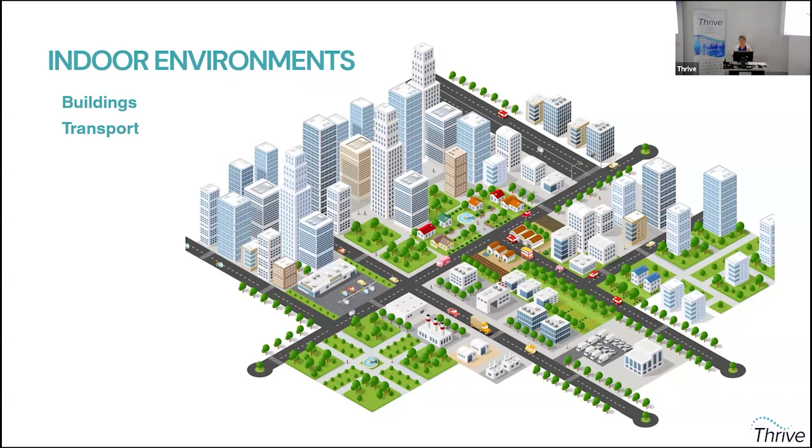The second premise relates to what is an indoor environment. I think we would all agree it relates to both buildings and transport—actually inside cars, buses, trains, etc. My next question is, should the report we're proposing for next year include buildings and transport environments? At this stage, the team I've been working with have only been focusing on buildings because we probably spend a lot more time in buildings than in transport.

Except perhaps for me—for example, I commute from the bottom end of the Gold Coast, so I spend 4 hours a day just coming to Brisbane and back to go to work, so commuting is fairly high for me.

But 4 hours a day is still much less than what I spend in buildings. So at this stage, we haven't looked for any quantitative data regarding the indoor air quality of transport environments. If anybody knows of any reports we should include, please let us know. What we're envisaging is that next year's report likely won't include transport, but it should be included in a reiterative report down the track.

So if we're looking at buildings then, I wanted to get an understanding of how we can best structure the report so it makes use of existing structures. One of my areas of research is the National Construction Code, which puts buildings into 9 different classes depending on their general use.

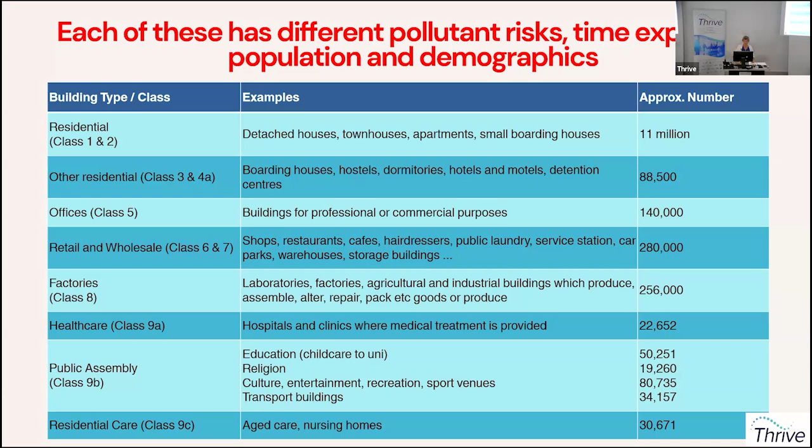Does anybody have any thoughts about this? The intent is to present the scientific evidence in a manner that's familiar to the policymakers and to the industry who are all involved in the design, construction, refurbishment, etc. and operation of buildings. Does anybody have any thoughts about that?

Just on the operation of buildings, the NCC doesn't really cover that—it's more of a builder's spec. Okay, I'll address that in a moment. So the comment, for those who mightn't have heard, is that the NCC covers the building's design and construction, not necessarily its operation. I have perhaps a provocative view on that I'll mention in a moment.

So, yes, mine. So we... yes, I'll touch all of it. You're absolutely right to group residential class 1 and 2 together.

But of course, class 1 buildings are in volume 2 of the NCC, whereas class 2 buildings are in volume 1. It's difficult to treat them as a single group because they have such different regulations, so the solutions for class 1 and class 2 buildings might be different because one you're talking about low-rise and single dwellings compared to high-rise buildings that are more commercial-like.

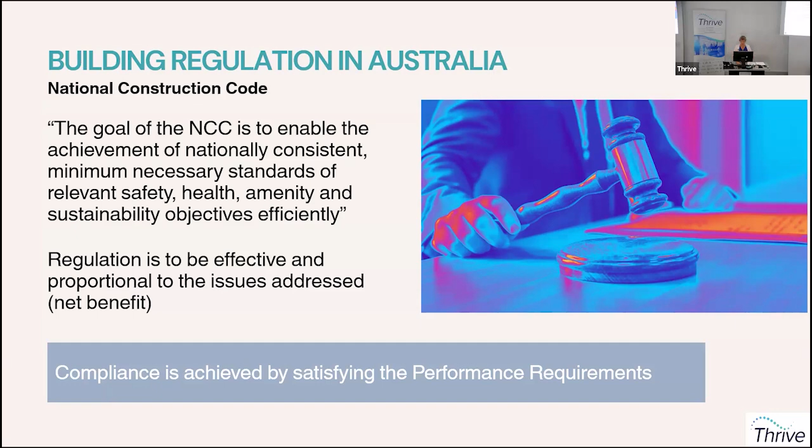Compliance with the National Construction Code is achieved by satisfying performance requirements. In the code, there are certain things called performance requirements that you have to meet in the design and construction of your building. So is indoor air quality regulated in buildings?

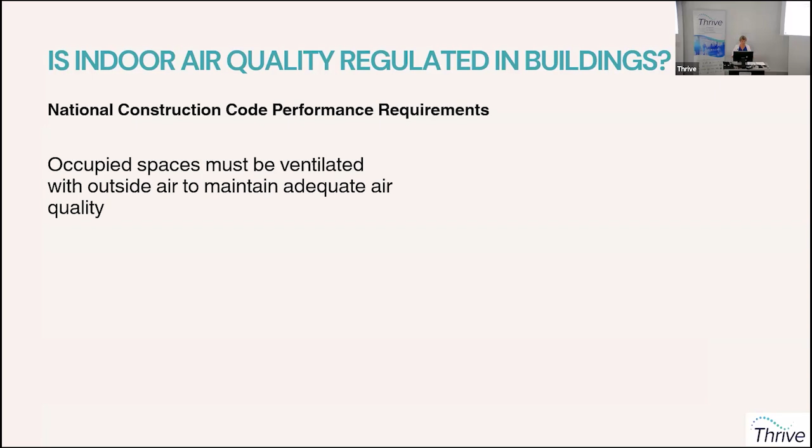I believe that it is. In the National Construction Code, one of the performance requirements is that occupied spaces must be ventilated with outside air to maintain adequate air quality. The second performance requirement is that mechanical systems have to be able to control the circulation of odours, harmful contamination, microorganisms, pathogens and toxins. These are must-have requirements within the building code.

The third is that any contaminated air must be disposed of so it doesn't create a nuisance to other buildings. This was an interesting one to me. I did a 6-month fellowship in London where the outlet from the gas appliances of the neighbouring unit was right next door to the fresh air intake for our unit, for example. So it was some of those things.

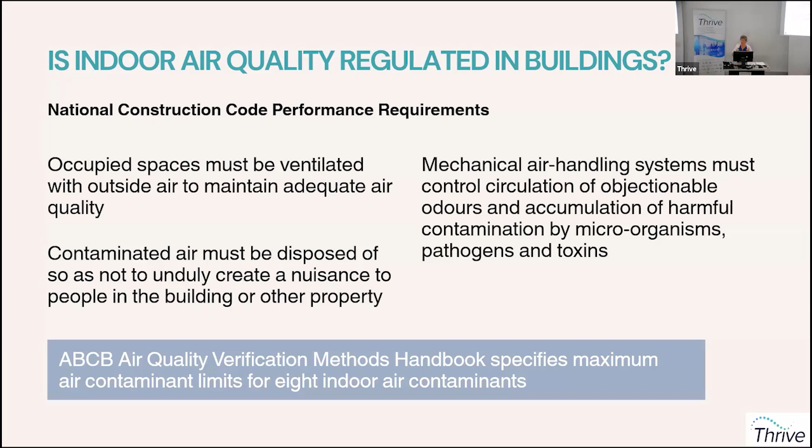So those are 3 examples of performance requirements already mandated in the National Construction Code that deal with indoor air quality. In addition, the Australian Building Codes Board, which manages the regulations, published an air quality verification methods handbook that specifies the maximum air contaminant limits of 8 indoor air contaminants.

In addition, in the code, smoke alarms and/or smoke detectors are required for all buildings. In Class 1 buildings, they must all have a smoke alarm, and in Class 2 to 9 buildings, they must all have smoke detectors and smoke alarms. So we already have mandatory indoor air quality sensors in every building in Australia, and in multiple rooms in every building in Australia.

So I've heard some people say, well, you can't tell people what to do in their individual homes, we can't tell them to have sensors. Well, that's nonsense - from the perspective that we already do that for fire, why not do that for air?

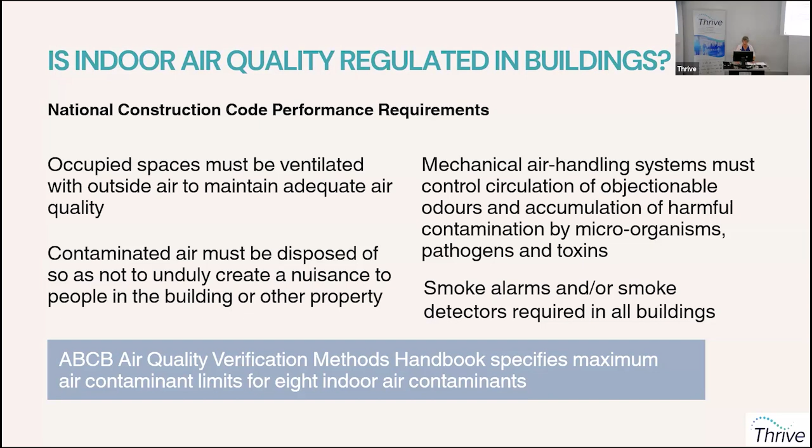It does raise a question, similar to what's reasonably practicable, which we'll address in a moment. What is adequate air quality? Maybe that can be interpreted differently depending on whether you're a scientist or whether you suffer from an illness that's particularly triggered by air quality.

But I'd argue that because the Building Codes Board have produced a handbook that sets limits to 8 pollutants, they're already saying this is the minimum level required. It would be interesting from a legal case perspective whether compliance with those requirements would be considered adequate air quality.

The question is, and it relates back to the question before about it being for design and construction of buildings, not operation - are the performance requirements enforced only at design and completion? Because in essence, a building has to show it meets these requirements before it's allowed to be occupied.

But does that go into the operational phases? Just a show of hands - who thinks it's just at the design and construction phase? Who thinks it is at the operational phase? And who doesn't know?

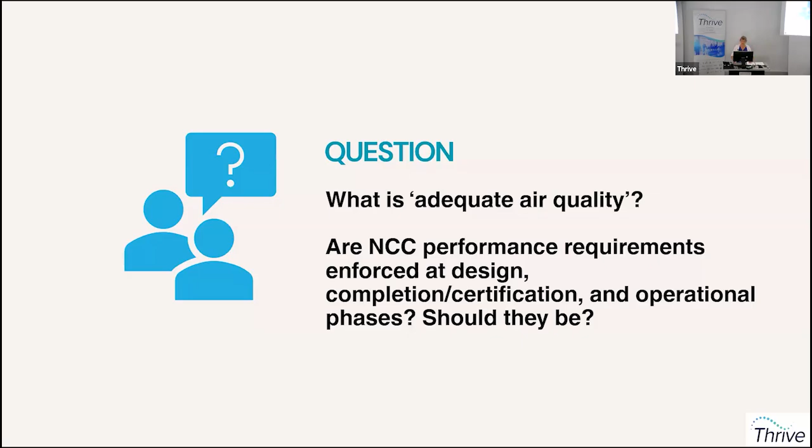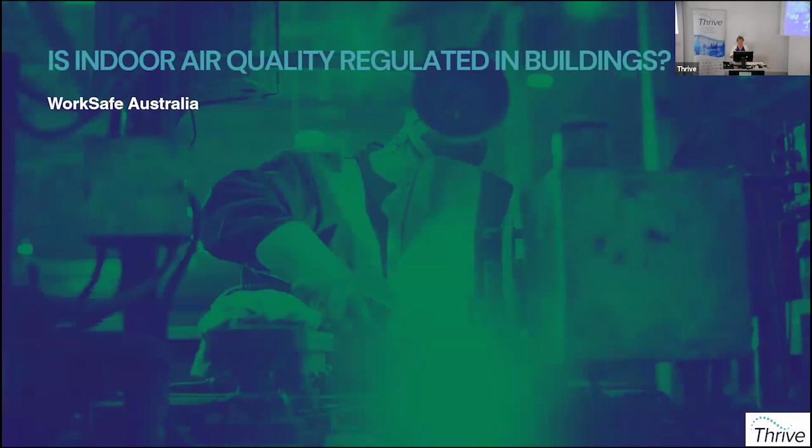I'll just look at other legislation - part of this was discussed this morning too, about whether indoor air quality is regulated. WorkSafe Australia was mentioned this morning as well. So, similar to the National Construction Code, the federal government doesn't provide legislation on workplace things directly - they provide a model code and the states can decide whether to adopt it, not adopt it, or modify it. But there are certain things within that code.

I'm just going to move off the chat for a bit so we can see the slides. As Liam mentioned this morning, if you're a person conducting a business or undertaking, you have a legal requirement to manage the work health and safety risks from air pollution at the workplace.

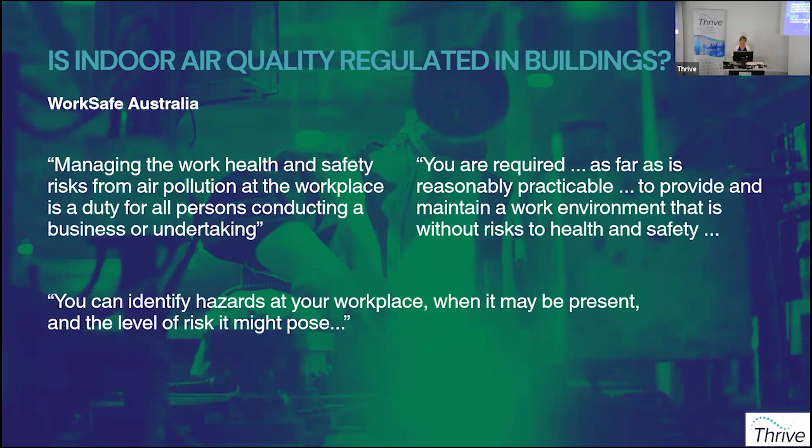Let's see if I get this done. You are required - and here's the word again - as far as reasonably practicable, to provide and maintain a work environment without risks to health and safety. There are some guidelines on how a business might do that through a risk management approach: identify the hazards, when they may be present, and the level of risk they pose, so as a workplace owner you can put in place ways of managing that risk. It's a risk management approach.

This morning we had a discussion about what 'as far as reasonably practicable' means, and as I tried to intimate this morning, that really depends on whose perspective you're taking. If I was a building owner and it would cost me money, I would say anything that costs me money is not practicable.

I would argue that what's reasonably practicable, which also means economically viable, changes from year to year depending on what technologies are available. So for workplaces now, because of the rise of low-cost sensors, the Internet of Things, and AI, it is probably reasonably practicable for most workplaces to put air monitors and sensors in nearly every workspace in an economically viable way. That's still to be determined, but that's one of my suggestions.

And as Liam also mentioned this morning, even though the WorkSafe guidelines are for the protection of workers, they're really to protect all people who go to a workplace. So that means everybody who goes into a shopping centre, a cinema complex, an indoor pool, or a gym, for example - the owner of that business is required to protect the air quality for everybody who goes into that place.

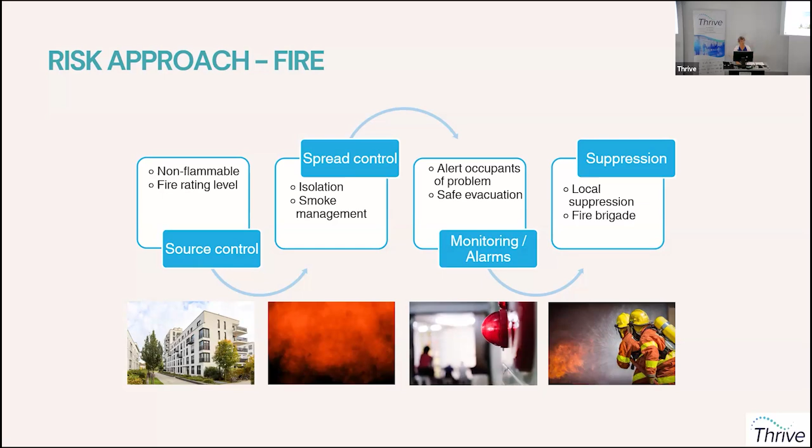So that risk approach to fire could be applied, for example, to indoor air quality. But the two main things from that risk approach are: first, that occupant safety is the priority of the approach to fire - it is not to protect the building, the things in the code are to protect the safety of occupants. Secondly, there are different solutions to fire management for different buildings depending on the context, the type of building, how many floors it has, and how far you are from a fire brigade.

Can the fire brigade hoses reach beyond 11 stories or so? The size of the building, the number and type of occupants, etc. So already there's a framework within the codes that provides a fairly good framework that we might like to apply.

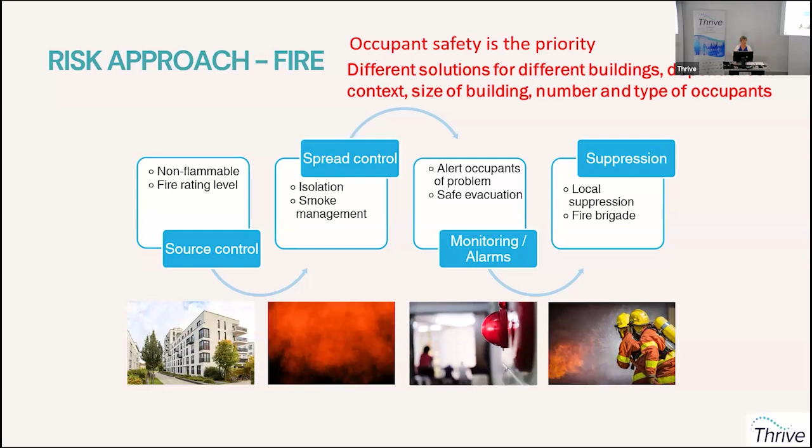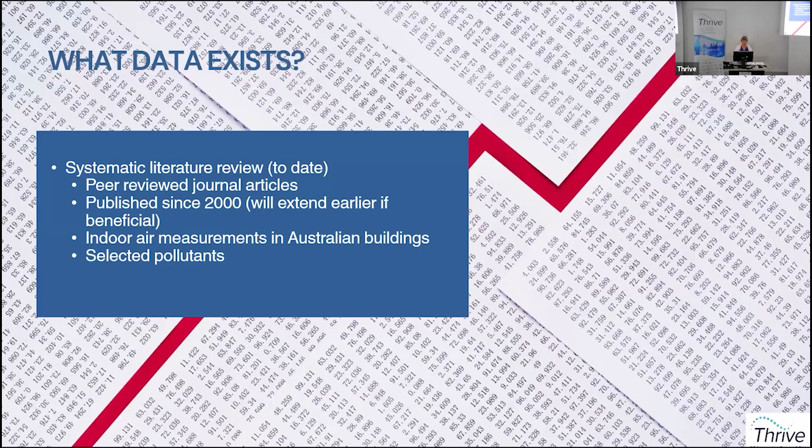So what we've done to date is we've started a systematic literature review with some new members to the Thrive team. Remember the purpose of this report is to provide quantified data about the state of indoor air in Australian buildings. We've looked at peer-reviewed journal articles published since 2000 - we had to have a year to cover, and that's already a quarter of a century old. We will probably extend that down to 1990 or so. We're looking at papers that have had actual indoor air measurements in Australian buildings, as opposed to simulations or qualitative data. At this moment, we've only looked at those 8 pollutants we mentioned before.

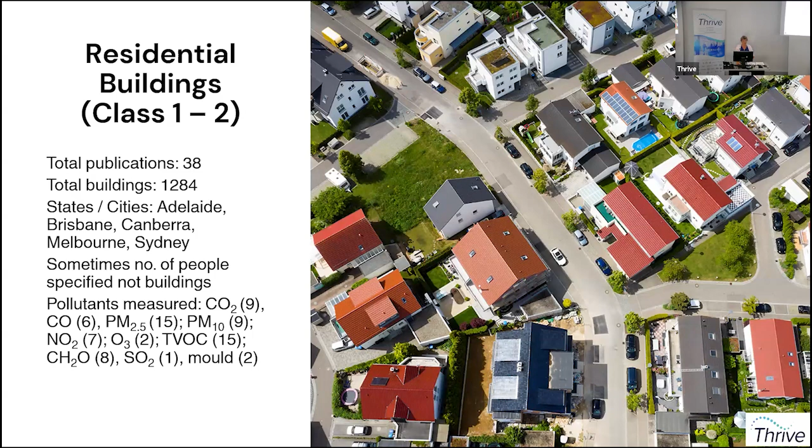So just quickly going through them: for residential buildings in class 1 and 2, we found 38 publications, and they cover 1,284 dwellings, remembering that we have over 11 million of them. So we don't know very much about what's going on in people's homes. Those papers cover 5 capital cities, and different reports measure different pollutants.

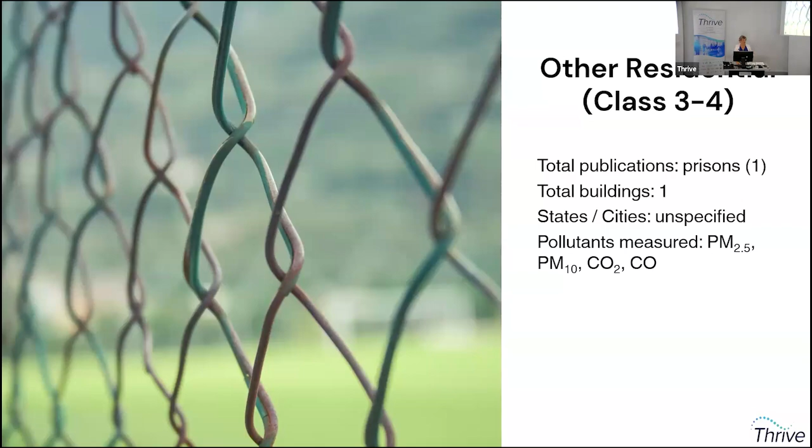For the other residential buildings, the only paper we found to date is a prison, and we don't know where that prison was other than it was in a regional area, which means there is no data about the indoor air quality of hotels and motels, dormitories at boarding schools, etc. Maybe that's part of the problem during the COVID thing, when we thought, well, let's just put everybody in hotels to keep them safe, when we don't really know what the air quality in a hotel is and how their ventilation systems work anyway.

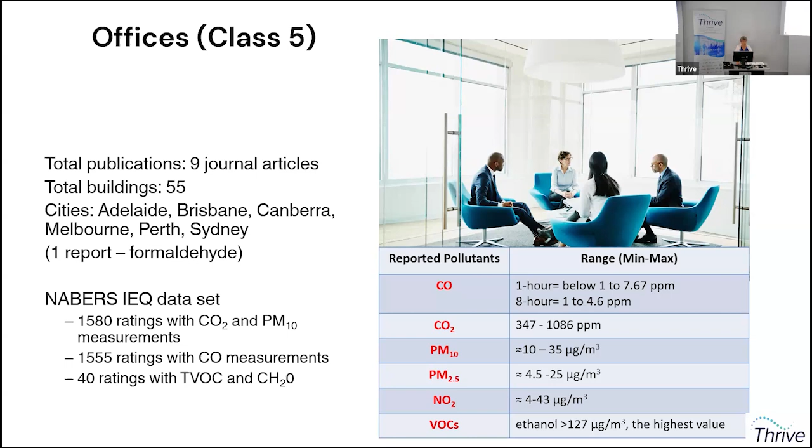We also intend to analyse the indoor environment quality data from NABERS - the National Australian Built Environment Rating System. They have ratings for water and energy in buildings, for indoor environment quality, and also now for embodied energy. So we will be looking at their data sets to see, for their office buildings over the last 10 years, what types of ranges of indoor air quality have been reported. But it's still only a really tiny proportion of the buildings that have been done.

For retail and wholesale buildings, it's also a poor example of what do we know. We found one publication about some cafes and restaurants and clubs in Perth, another about another building in Perth. But in essence, we don't know anything about shopping centres, about individual types of shops - for example, hairdressers and nail salons, that actually have a high chemical load to start with.

For industrial buildings or factories etc., only one paper was found, and that was a brewery. So we don't know about the air quality in a lot of our industrial buildings. But presumably, because a lot of them deal with chemicals, they're being covered by WorkSafe Australia.

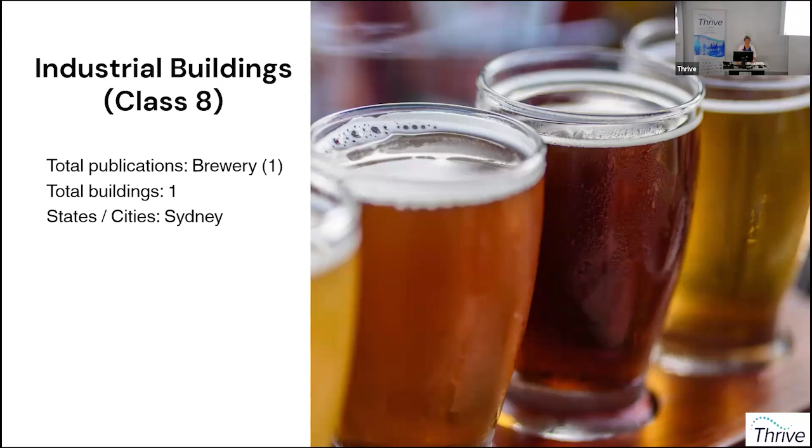So of the 12 million buildings that we have, we probably have data ranging from the last 10 years or so on maybe 0.01%.

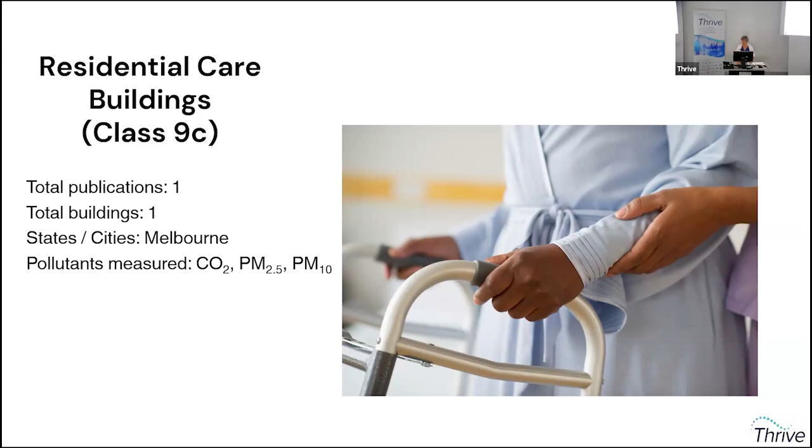So what's next is the role of partners, if you wish to be involved in the development of this report. One thing we're really interested in finding is if you have data to contribute - measured, quantified, scientific data about indoor air - things that may not have been published in the peer review process, that will be interesting, and a range of things. So come and speak to myself or Rafat or Lydia later.